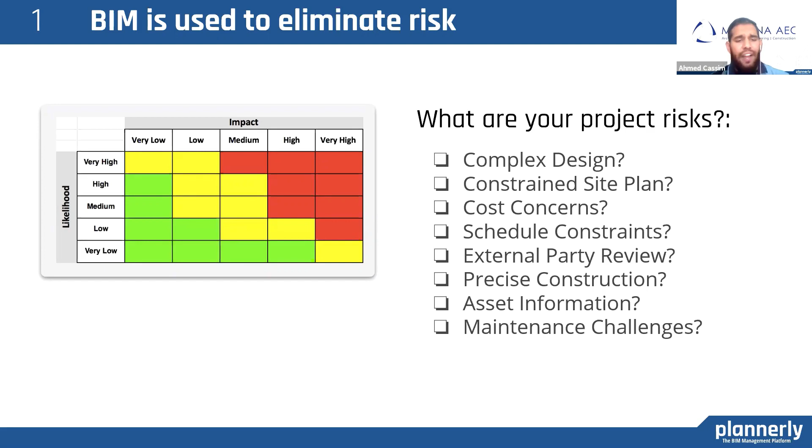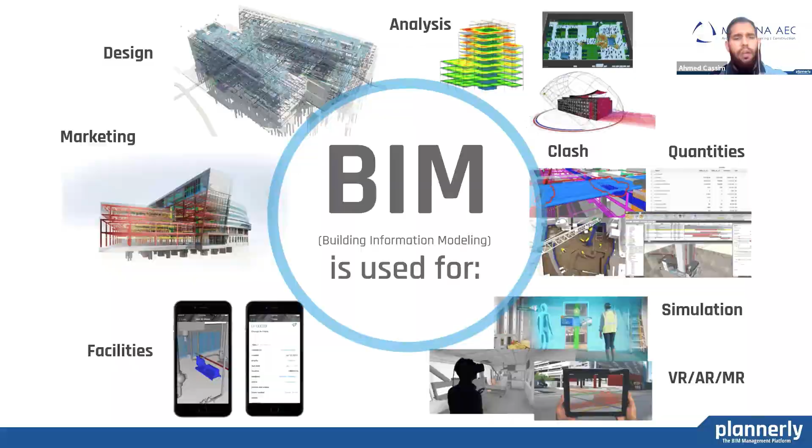You've got to identify the main risks and use BIM to help you eliminate these risks. Here are some models that could align with some of those users. These are some examples of a typical project lifecycle, from design to coordination, all the way to facilities management. Because we can use BIM for so many things, let's do everything, right?

Well, no, that's probably not the best strategy. A targeted approach is always the best. However, along with the excitement of the opportunity to do BIM for so many reasons, it can be confusing. With so many potential benefits from BIM, sometimes the process is set up for failure from the start.

So that's why we need a BEP, in order to define the BIM uses and requirements. But what do we need to include in there once we've identified these BIM uses?

Here are some typical categories for the types of content in your BIM execution plan. Maybe starting with an introduction of why we are doing BIM in the first place, on this project specifically, through the BIM uses.

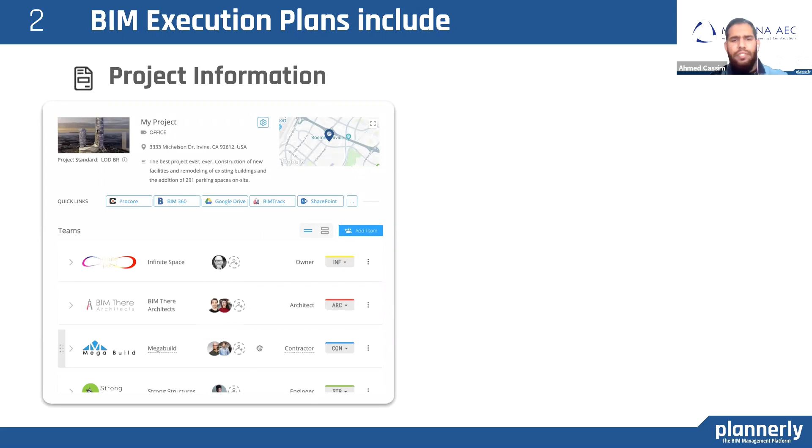Processes to follow, standards to reference, tech to support, formats to deliver, terms to comply with, and the scope for each participant. Very important: a BIM execution plan should include everything from project information to teams, team members and their contact details, even some links out to other web applications that the project needs to use.

The introduction can be different based on the team's knowledge of BIM. Some projects might need to have a very robust mission statement and definition of why we are even starting to adopt BIM. Or it might be further along, it might be training introductions. Others might be much more detailed into the processes and understanding of how they are going to deliver.

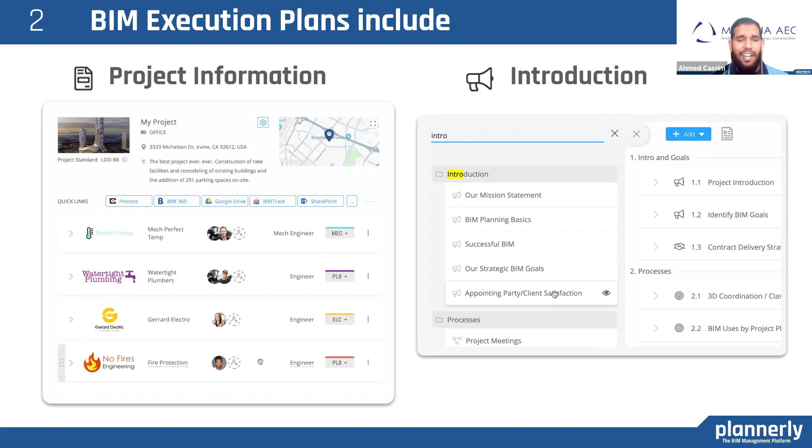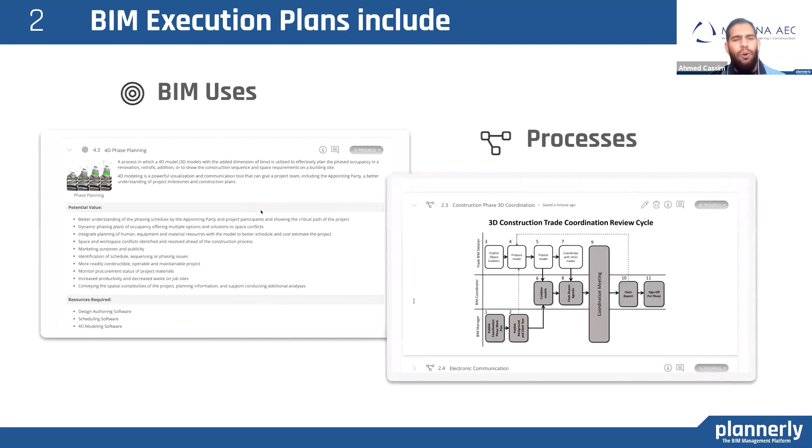You've got to define the BIM uses, define the customer, align the services with capabilities. Which processes do you need in order to achieve those BIM uses? Do you need to explain in a flow diagram how to create some deliverables? And then, are you following certain standards? Are you following the ISO standards, the ISO 19650 perhaps?

Define the terminology so that everyone on the project speaks the same language. For example, what is an asset information model, and how will you ensure that the model is created and is fit for this purpose? How do you standardize it?

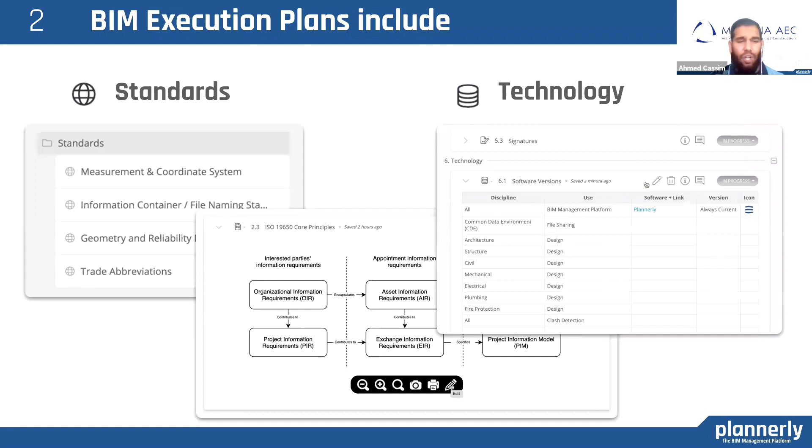How will you support this with the right technology? How will you manage software versions? How will you define your information requirements and your handover? Essentially, the format that you are looking for, and we recommend open BIM standards and IFC as a transfer mechanism.

Remember, the BEP needs to be a contract, and you can add a signature block so that you can actually get everyone's signatures.

So scope, probably the most important part of the BIM execution plan, is the scope. You want to align what scope is needed, who is responsible, how much information is needed, what are the BIM uses. Having a clear scope helps everyone on a project.

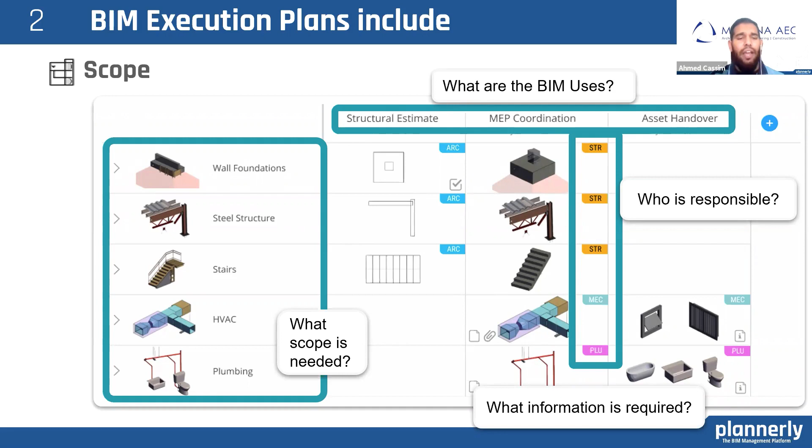However, there are many challenges, ranging from the sharing of comments through dozens of emails, which can be confusing and challenging to aggregate, to the simple question of who even has the latest BEP, who has agreed to it.

The result can be large documents. It's a time-consuming process, and we hear about teams not being able to adopt it and potentially being more confused.

So when you ask, 'What happened to the BIM execution plan, did you get that?' 'I sent it via email.' 'Have they seen it? Did they read it?'

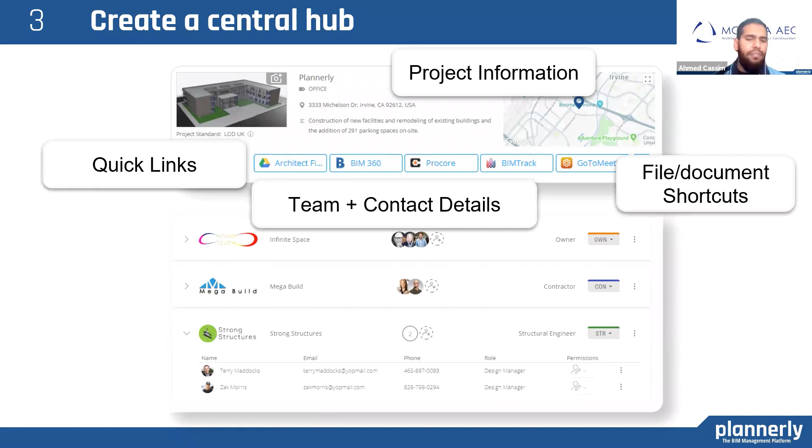So how do we engage the team? A few tips: create a central hub with project information, contact details, etc. Having it all in one place makes it easier for everyone, and let them update it rather than you having to update everyone else's contact details.

How about making it simple? How about making it a workflow and using a diagram, being able to visualize those standards and processes, making it more attractive, maybe for people to get into?

Engage your team. Be able to get that feedback, create it together so that it feels less mandated and more of a team effort. Use video content.

It's better than a whole five-page set of text people are potentially not even going to read. Sometimes you can really save a huge amount of pages or paper by just using videos. Just a one or two minute video on how to maybe model something in Revit or use clash detection in Navisworks, etc. And use rich content in the form of flowcharts and embed those so that they are interactive, so that people can view them.

It will be easy to search and navigate information within sections. Also, standards or processes are more clear due to using the rich content that is your videos, your images, iframes, flowcharts.

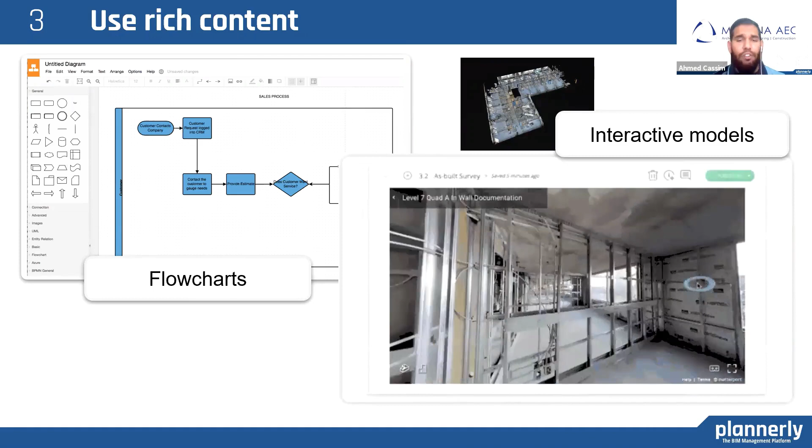And so even when we do have a BEP, with everything we need to include in it, and we do get the team engaged, how do we get agreement? Some of the challenges pertaining to the agreement are the way the document was created was in a very isolated form. It's difficult for people to agree on it because it's a single file in a single place most of the time. It's also difficult to get feedback because once the document is created, they send it to, say, 10 people on the team. That means that you need to get feedback from 10 people.

Gather that information, update the content because it's such a large document. You have this bottleneck of the items you need to update, and it takes time to actually end up with an agreed document. So we see the best results when we take bite-sized releases of information. So taking a section of the document and publishing or sharing it, and only seeing and controlling the amount of content you want them to see. That would give someone who is reviewing your workflow enough of the document to be able to comment, and comment precisely on that section, rather than to review 100 pages in a PDF that was sent via email.

It simply becomes like a comment that you can add like on social media. Leave a comment, provide feedback, and then get notified of that feedback. So updates now would take minutes and not days. You want your BEP to be always up to date and accessed online, to have built-in commenting and approval workflow, which helps progress approval by section. You want your BEP to be able to collaborate, and updates should be continued throughout the project. Also, it should be a live document, but you also want to be able to archive it as a PDF and lock or share the link with others, which is a very important feature.